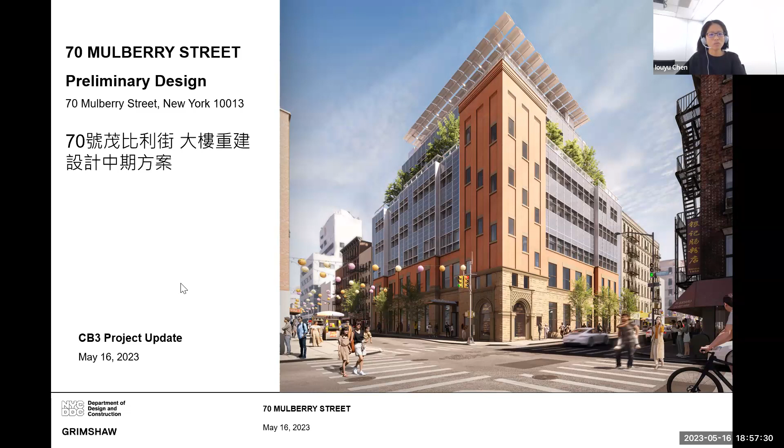Following the January 2020 fire and July 2020 announcement of funding and process goals, the community visioning process was initiated in September 2020 and led by 3x3 working for the owner, DCAS. An initial preliminary research and planning phase was followed by a series of community meetings and workshops, a survey, and an ongoing document review for 90 days.

The result of the community engagement led to DCAS and DDC brief and a budget to rebuild 70 Mulberry in November 2021, including additional offices and tenant spaces and a multipurpose athletic activity space in the new building. Grimshaw and the team was selected by DDC to design the new building. The design team started the programming phase in July 2022, a meeting with 5 tenants that previously occupied the building and will return to the new building. You can see a list of community engagement that already happened, and at the bottom is upcoming engagement event.

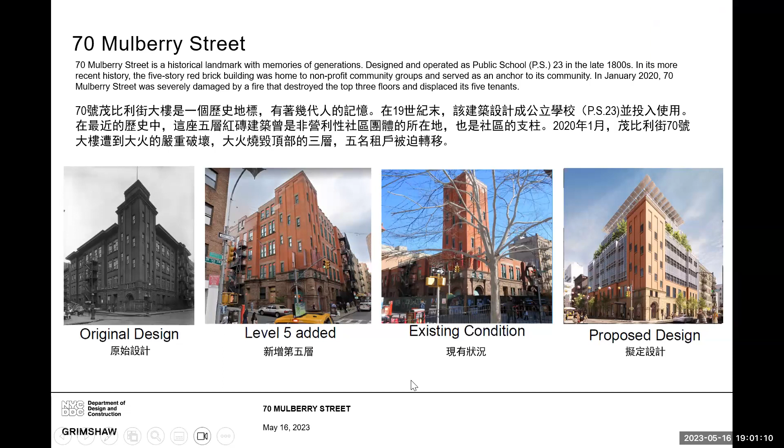I'm sorry to interject here. We have just seen this presentation last month, most of it. We were hoping that because we have such a crowded agenda, perhaps you folks could focus on just what's new from the last time this was presented at CB3. Would that be okay? Yes, I think the next page will be new content. Thank you. Sorry, we're just very pressed for time.

So this is where we talk about the design updates. What has been different from the previous show?

First, the biggest one is we keep the existing cellar boundary and the cellar floor slab, and build a new level 7. So the building adds an additional floor, level 7. We retain the current extent of the existing cellar without any further excavation beyond its perimeter walls and without going deeper into the ground. This approach aims to reduce expensive construction and mitigate potential unforeseen risk associated with the cellar, and we move half of the mechanical space from the cellar to level 7. The leftover space on level 7 is assigned for additional community space, enhancing the overall value and livability of the building to the community.

The second point is we apply building integrated photovoltaic panels to the new facade and a PV canopy above the roof to generate renewable energy. By implementing these panels on the new facade and adding a photovoltaic canopy on the roof, we aim to harness the maximum renewable energy through solar power generation. The BIPV technology allows photovoltaic panels to be seamlessly integrated into the facade, with maintenance similar to a typical glass facade.

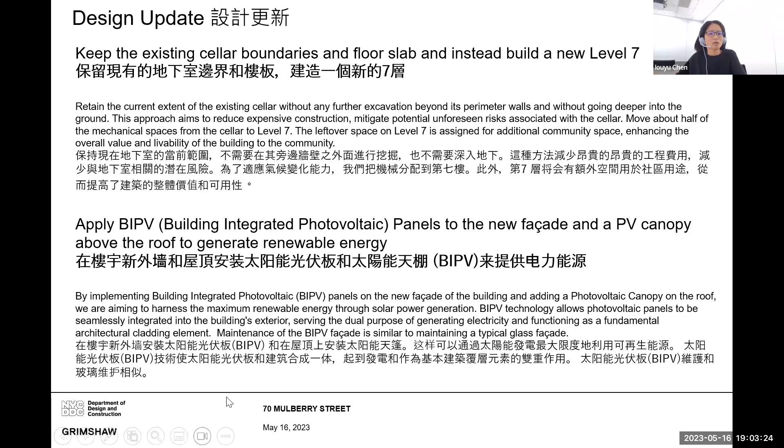Next, we'd like to share the previous rendering we shared with you. It was a 6-floor building with level 6 setback from the street. The stair tower is a key contributor to the architectural character, but in the previous model, we modeled it 8 feet taller than it is in reality.

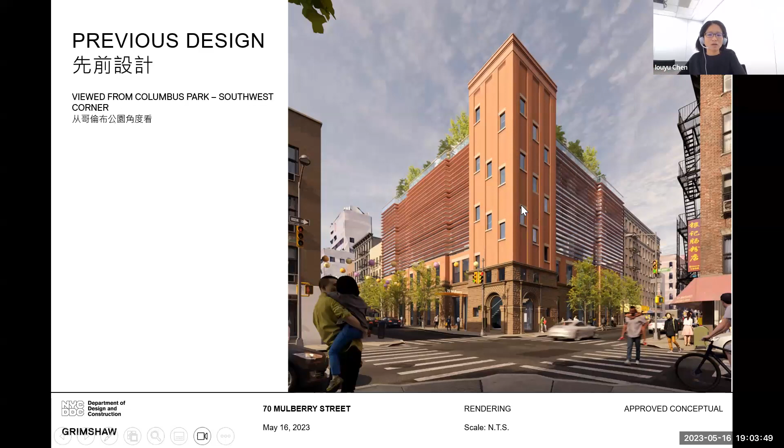We have street trees planted echoing the greenery from Columbus Park, and trees will be planted at the terrace level. The design is to distinguish the old and the new facade.

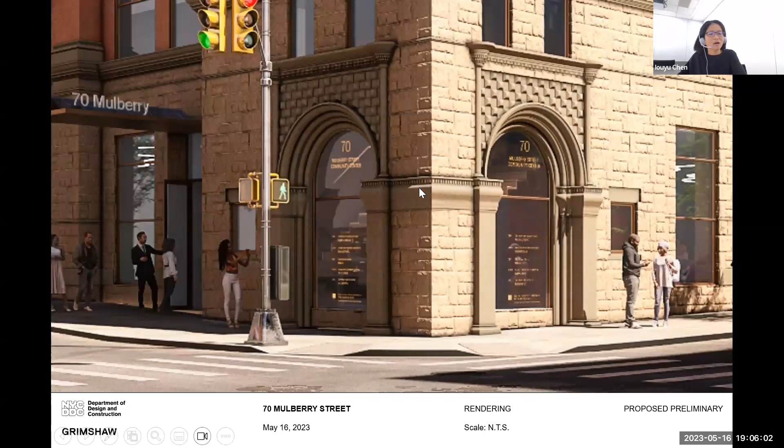We're taking a closer look at the proposed ground floor. You can see the new entrance at Mulberry Street, adjacent to the stair tower.

The tower window proudly displays signage showcasing the 5 organizations within the building, along with important building information. This serves to broadcast the diverse programs and services offered, while also encouraging the community to make use of this vibrant space. We are in collaboration with an advisory group to do the signage design to ensure it maximizes its benefits to the community.

We are going to walk you through the revised plan. First, this is the proposed site plan with 3 street trees planted along Mulberry Street and Bayard Street. And then we have a PV canopy installed on the roof.

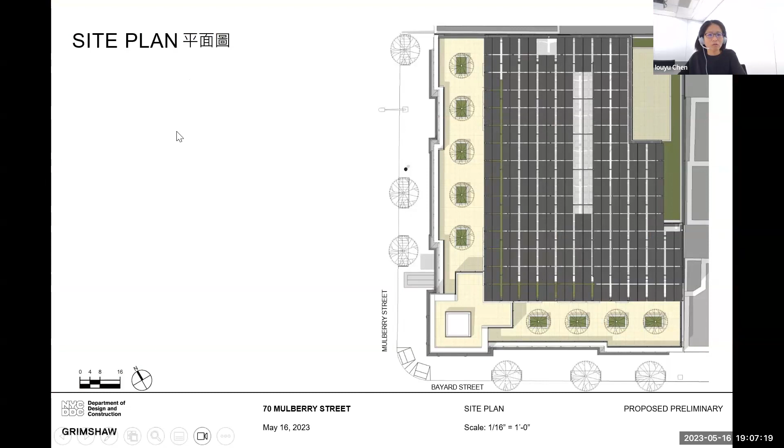This is the first floor plan, and we have entrance at Mulberry Street. Tenants and members will have their badge and be able to swipe through the turnstile and go directly into the stair towers and up to their floors as in the pre-fire building. A visitor will go through security and be given a temporary pass to get through the turnstile.

For those, to Jake's point, we'll just point out the key changes since last month. The building trash area is now integrated along the back of house service corridor, and the elevator at the south is a swing elevator, serving both the freight and passenger elevator functions, so the back of house services are not crossing the front of house services.

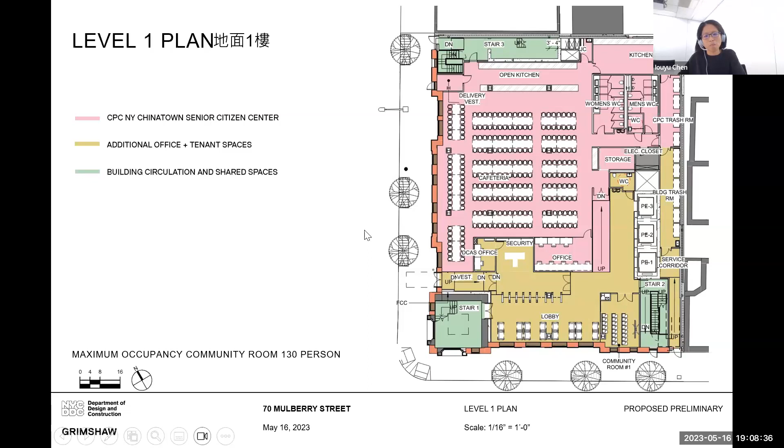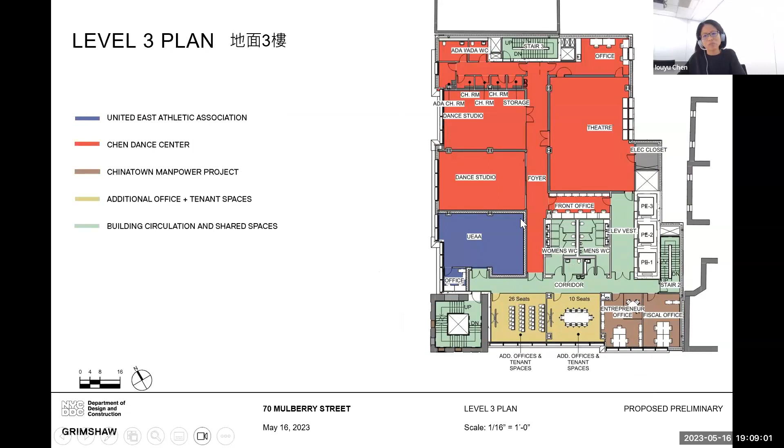This is level 6, the double-high multi-purpose space. In the following slide, we will share more about the flexibility and how it adapts to different event modes.

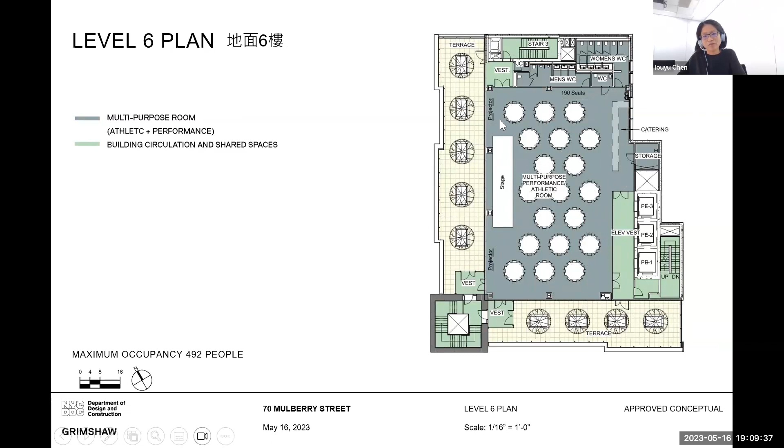To support the multi-purpose room on level 6, as we mentioned before, we have storages and fabrications, and the space can be accessed through the service elevator.

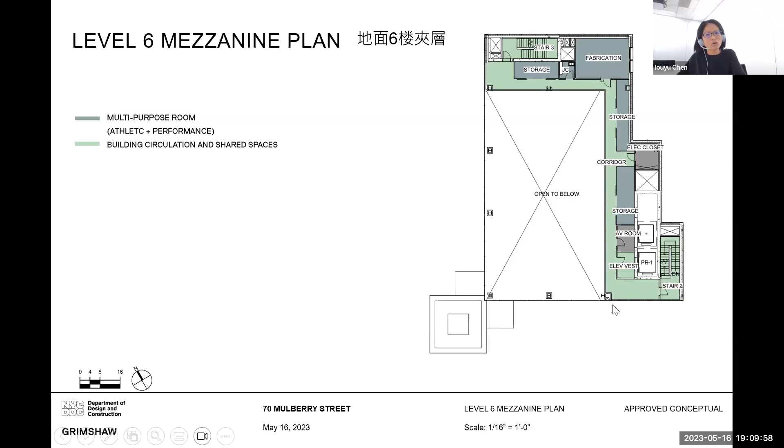This is the new level 7. This is the bonus area, extra space at the southwest corner, facing Columbus Park, which will be dedicated to community use.

As mentioned earlier, we located about half of the mechanical space to level 7, and this is the leftover space, the bonus area. It's additional community space, and it's a prime location with a great view towards Columbus Park.

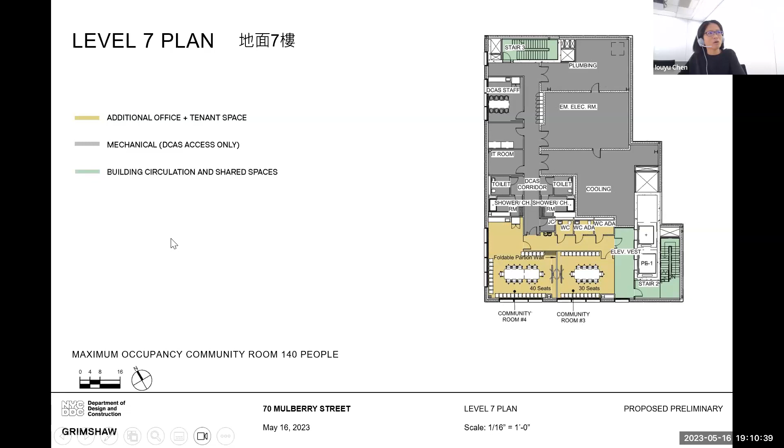This shows the roof plan. We have a seating area along the west and south property line.

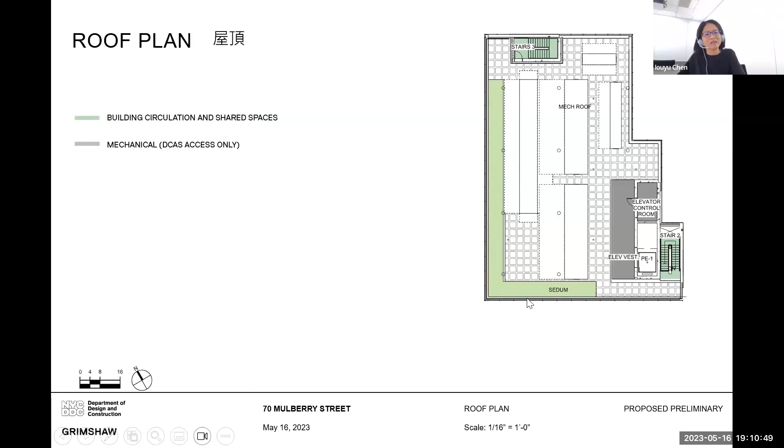We'd like to take a closer look at the community space on level 1. It's equipped with movable partitions that can be folded to accommodate various activities.

The lobby area can be arranged in different configurations based on the needs. For regular use, it serves as both the lobby and the community space. For events, the lobby area can be extended to create a larger space suitable for lectures, community meetings, and galleries, as shown at the bottom.

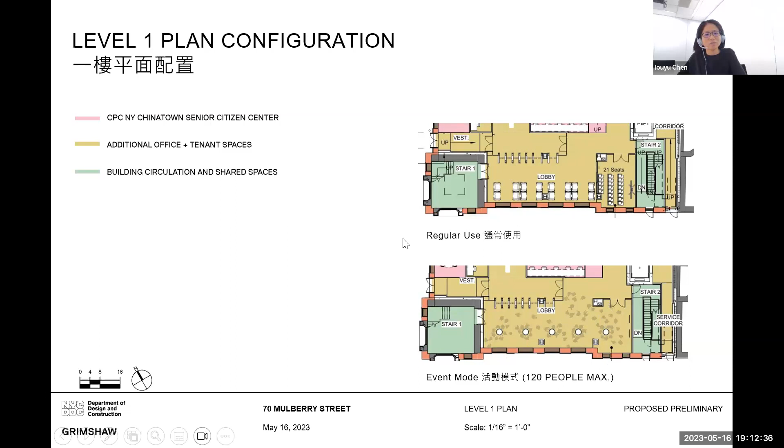This is the level 6 plan configuration. The space is designed to accommodate a wide range of events such as community galleries, press releases, job fairs, and fundraising activities. This slide illustrates the versatility of level 6, showcasing diverse activities ranging from galas to lectures, with a maximum capacity of 492 individuals.

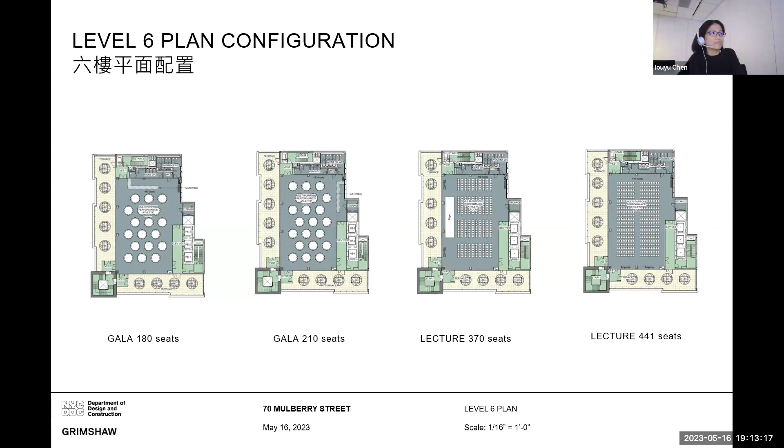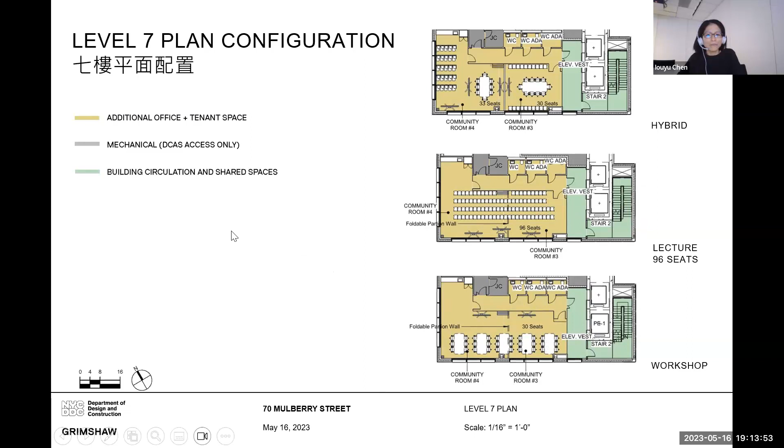This is the update we are very happy and excited to share with you. Please contact us if you have any feedback or any questions.

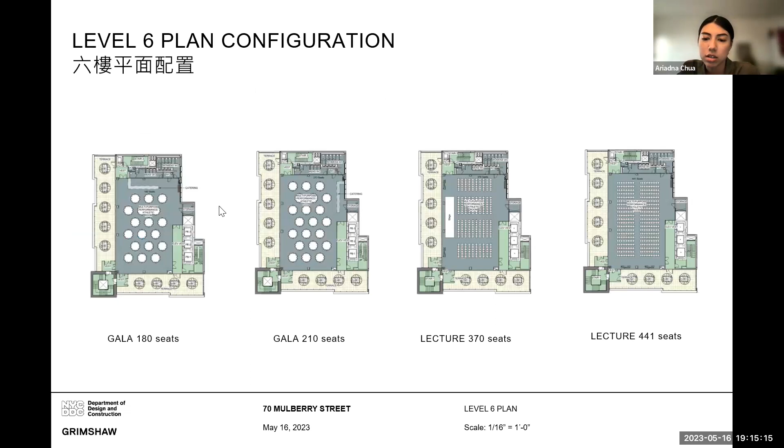We always have space on the 3rd floor for the community space. The new space will be on level 7.

Okay, that's clear. And then I was wondering where the addition of the solar panels came from. Was this something that was requested specifically? How did that end up being added to the design plan?

I think the previous design we shared is a massing study, and we are investigating different cladding material for the facade. And we met with the community members. We found we want to make this building forward-looking, and make a commitment to the next generation. We figured climate change is the very urgent task for our current generation. So this building should demonstrate that statement, the more forward-looking for the next generation.

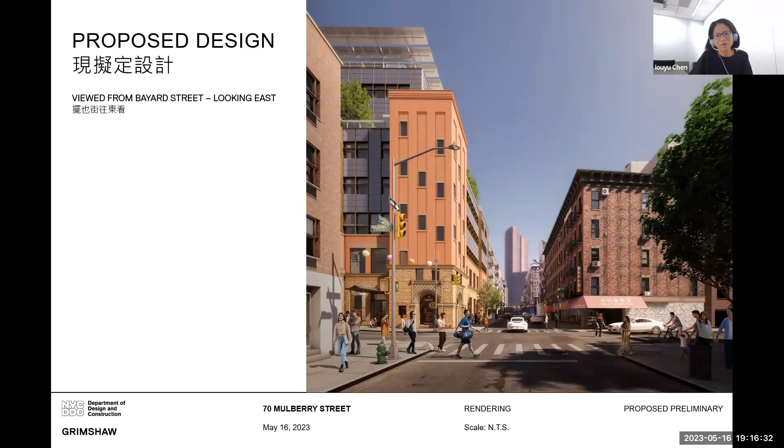And the building photovoltaic, as you see on the screen, the maintenance is similar to the glass facade. It's very low maintenance, but at the same time can generate energy up to, I would say, up to 25% of the building energy consumption.

That's clear. Thank you.

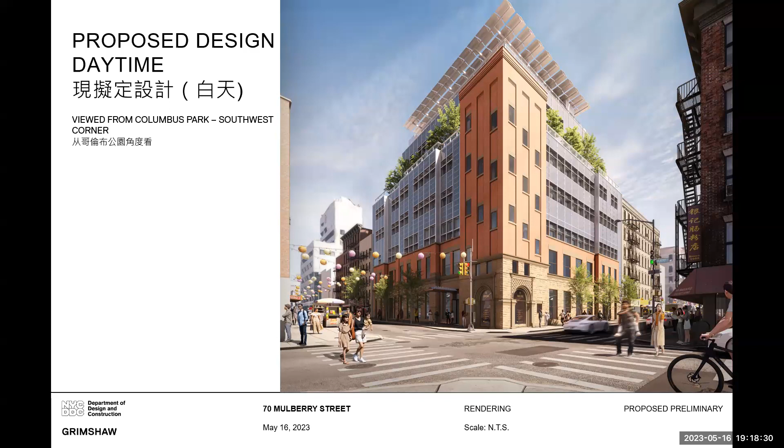For your first and third questions, I'd like to defer to DCAS, and for your second question to Grimshaw. So, Joe from DCAS, please.

Thank you. For the first question regarding the additional community space, that will be reserved in a similar manner that the rest of the community space is in the building, through a booking process that DCAS will establish, so that all the community space in the building will be booked in the same manner. Also regarding the question about MOCA and relocation, the commitment was to restore all 5 tenants. I'm unaware of any communications or discussions otherwise, but I will make a note of it. Thank you.

Yeah, and I can jump in and add to Iouyu's explanation on the facade and the PVs. I think for us, there was a strong sense from the community about looking back and respecting the past and the heritage of the building, and preserving what's left and making it integral into the new design. And also our desire for an optimistic and hopeful building for future generations. This is a place where the community gathers and learns, people get training, kids learn new skills, socialize. And in order for them to have that hopeful and optimistic future, we need to address the climate emergency. So for us, that was the way to reconcile looking back with respect and looking to the future with hope.

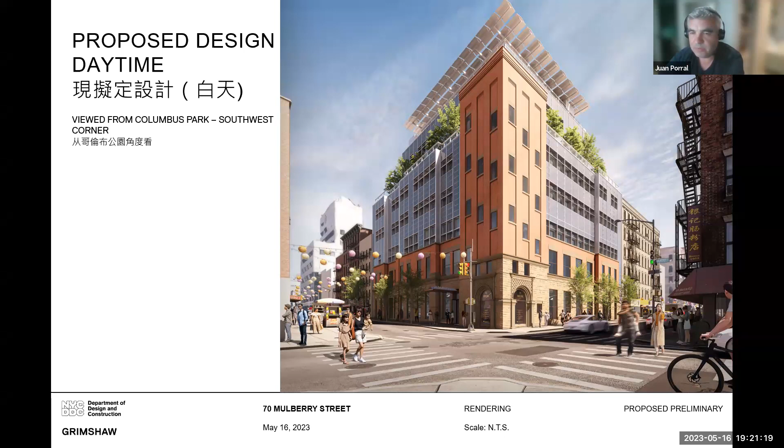So our engineers are proposing that, I mean, we're using all the electricity that's created here, but it feeds into the grid if there's any excess, rather than having batteries on site, which are costly and still have some risk, you know, about fires as we've seen. So yeah, that was their suggestion. It's the most effective way to do this.

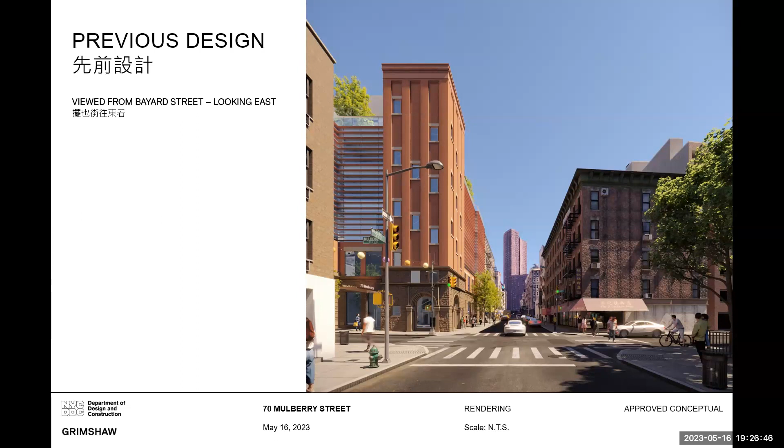I was a bit hesitant to respond, because I am on the landmarks committee, but I feel remiss that I didn't follow what LPC said about the building when you went to landmarks. But I, of course, agree with Richard. It just doesn't complement, I don't think, the lower floors. The upper design does not complement the lower floors. It doesn't complement the community. I think we're seeing too much of this gray, this gray material.

And I just don't understand why you didn't try to replicate what was there before. You can add the top floors, but it just doesn't match well. It just doesn't look well together. So I agree with Richard and Eric. Maybe you should go back to the drawing board and try again. Thank you.

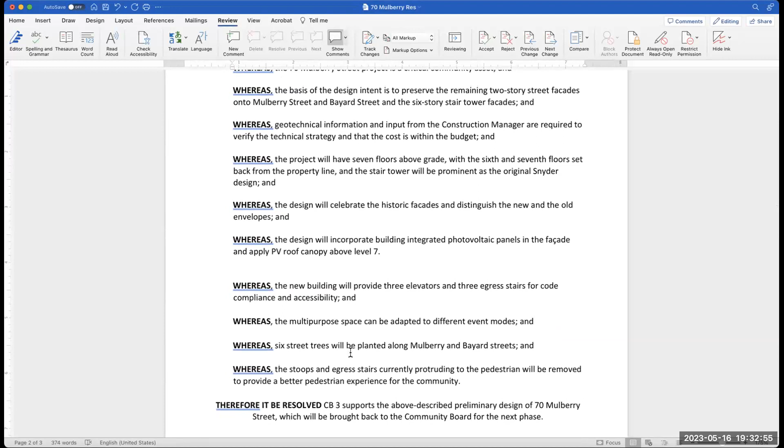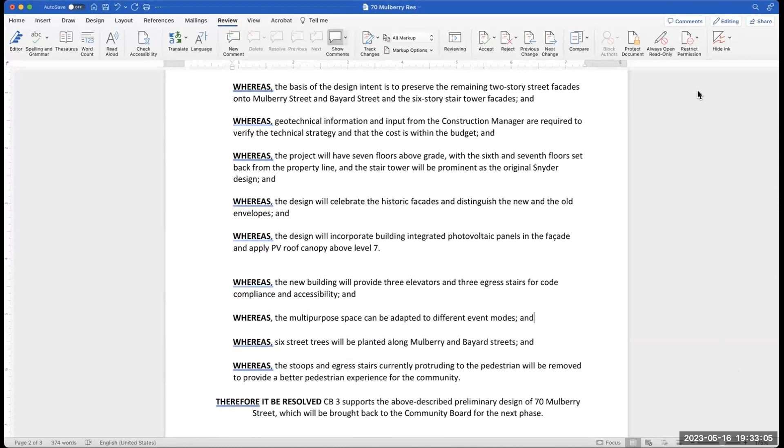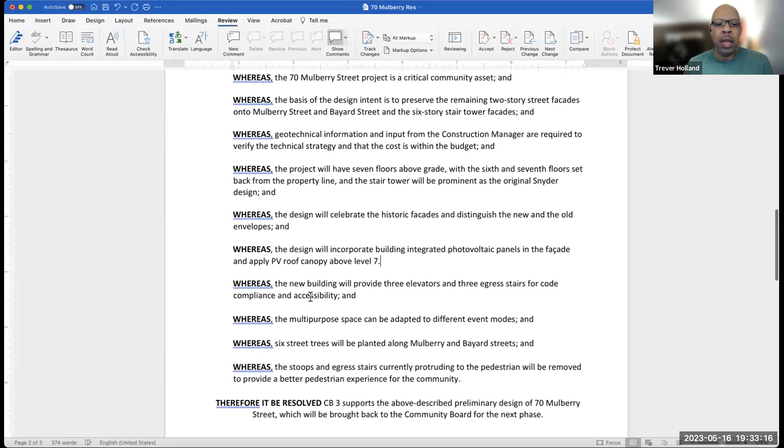I see hands raised. Trever, go ahead. Yeah, I think when we do this, it's important that we not take a position immediately. At the last line, 'therefore it be resolved, CB3 supports' - I think that just immediately puts it into a state that not all members may or may not agree to. So I think it's important that in most of the resolutions we write, we leave that blank. We need to take that out before anything. We did hear some concerns from the community. I was hoping to hear some more from folks who live in the community. I know we heard a lot from preservation specialists, which is critical, but what is also critical is for folks who live in that area. I know there were a lot of people on this meeting, and maybe they didn't feel it was appropriate to speak, but I didn't really hear that. Just to make sure that when we write resolutions, we don't immediately say that we support or not support a particular position.

Sure, and I apologize if this was a violation of norms. My understanding was that when we receive a model resolution from an agency, we can take that resolution up as written. This was not written by me. This was a resolution written by the agencies and sent to us for us to approve, which is why it says that we support. If we decide that we don't support, of course, we can take it down.

Now, I'm sure Susan will correct me on the norms here. Susan, if you want to go ahead. No, I'm going to say I feel guilty that I didn't catch that. Usually we take their resolution, which captures all the information, but leave, as Trever says, leave the last part blank because it's not predetermined. And I think we just got it from them, and I certainly didn't read it closely enough.

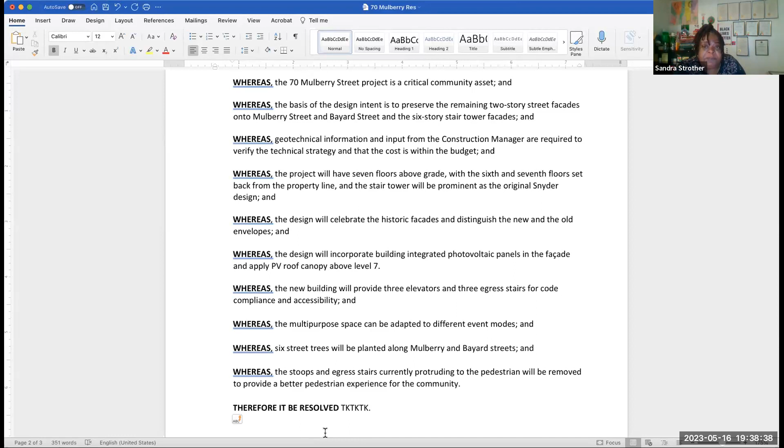Okay, Sandra, do you have amendments that you'd like to propose, or Trevor? Sandra first. No, I won't, because like you said, it's already been approved. I wasn't at the last meeting, so you're only talking about a specific part of the building.

Dominic, go ahead. I just want to say, I think I would be in favor of approving this. I know Trevor's working on some language for how to incorporate some of the feedback, so I think I'll wait for him to do that. But I hear the concerns, and I think when we are facing the crisis that we're in, and you're developing something, it's very difficult to retrofit once it's done.

And I think it would be great if there was some way to break up the panels a little bit more. I think that was what maybe some people were responding to, but I think fully removing them would be an immoral mistake. So I would say that we should support this as pretty much as is.

And also pointing out that it should be 'be it therefore resolved,' not 'therefore it be resolved' as it's written at the bottom right now. I noticed that, and I was having like a Mandela effect thing happening where I was like, is it always 'therefore it be resolved'? But that doesn't sound right. Thank you for your comments, and I will make that change.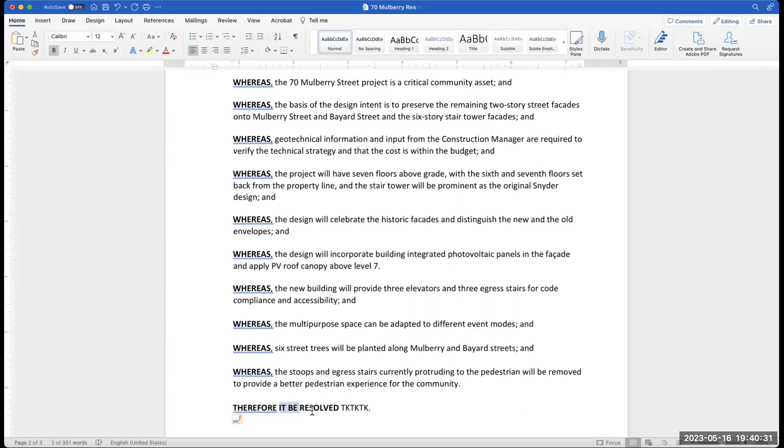Ariadna, and then we can go back to Trevor and Sandra. I had a clarifying question. So if we were to edit part of what we approve—let's say we remove the full photovoltaic panels from the resolution—does that mean we only approve the additions that were made in the plan that doesn't include those panels, for example?

Are we able to pick and choose the changes that they proposed? Can I defer to Susan on that procedural question? I think you can approve or not approve whatever you want, but if they have a design that has solar panels, are you saying you don't approve them, or are you just leaving them out? Do we need to word this carefully to refer to the previous design we already approved, or reject it fully since it wouldn't be the design they're proposing anymore? I think you could ask that they revisit the solar panels.

All right, Trevor, go ahead. I share Dominic's concern about incorporating the solar panels, but I want to ask the architect about them, if I could. From the picture shown, they appear to stick out over the roof. If you were to shift those back to on the roof, how much does that change? Instead of them hanging over the side, if you move them back to where they were on the roof, would they still be as efficient?

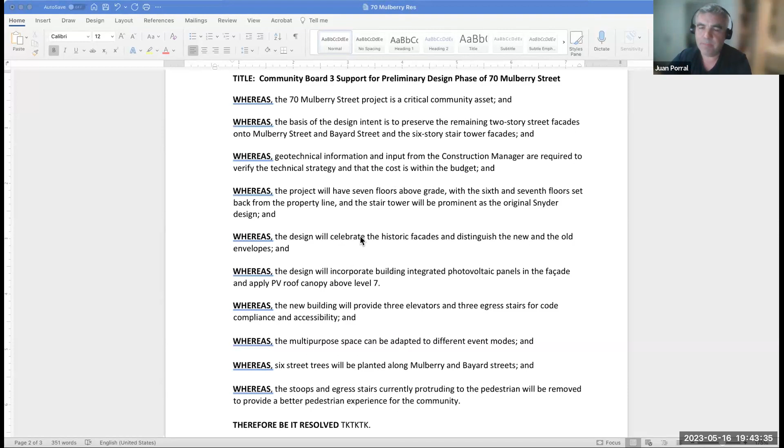I guess you're saying there's something behind those panels, based on the renderings, that prevents them from moving back further. Right, because we show the site plan, and there are PV panels over the mechanical roof, the setback piece, over all of the mechanical roof. So it would just be about eliminating some of the panels on Mulberry and Bayard, reducing the amount of panels, because we can't push them back further since we're already over the site.

So you're saying you can't push them back to where they're over the roof, they're back as far as they can and actually overhang the mechanicals. They're literally over the roof. It's the angle, the way the rendering is done, that makes it look like they're overhanging, but they're not. They're on plan, literally set back 20 feet directly over the mechanical roof.

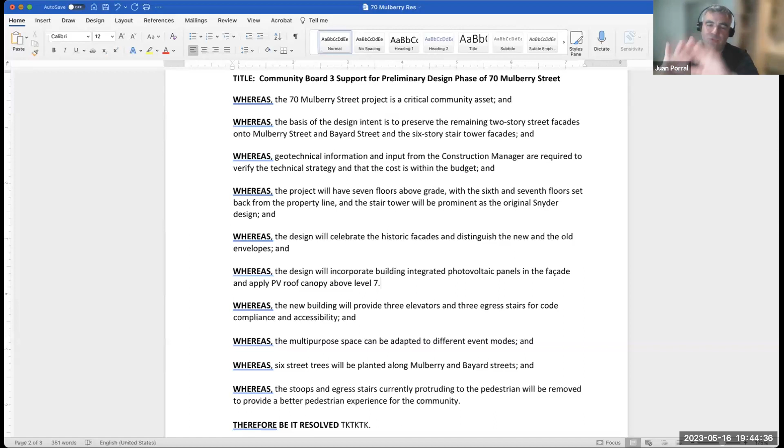Okay, it's almost like a perspective trick, maybe from trying to straighten the building in perspective to show it vertical - that's what happens, it looks a bit distorted at the top. If we did a human view from street level, the eye doesn't see it quite like that, you'd have to look up. So trying to show the whole building in one rendering becomes a little distorted in order to do that. It's not how a human eye would see it. Okay, thank you.

Megan, go ahead. In light of Juan's comments just now, knowing that those solar panels are set back 20 feet, just like the 6th and 7th floors, and also in light of the fact that we've, as a community board, already agreed to most of the design of this building - it's just these new aspects - I would lean towards supporting this project.

Thank you, Megan. So in light of everything we've heard from the architect, and thank you for sharing that context - Trevor, Sandra, do we still have amendments we'd like the committee to consider, or would we like to consider the resolution as is? I don't have any additional comments. Neither do I. I would like to see an additional rendering, but understanding that we're time crunched, and there's something on the agenda dealing exactly with this type of issue, I don't have any additional comments.

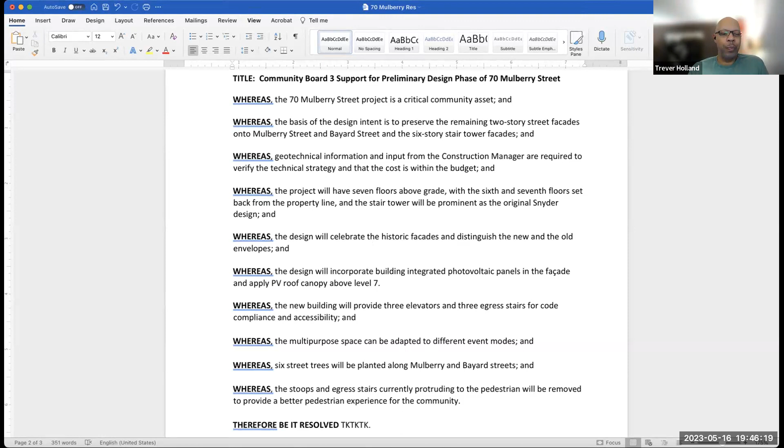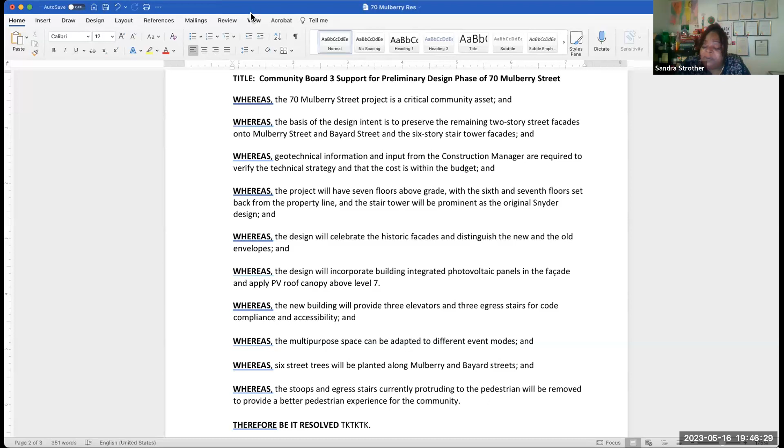Neither do I, Jake. I just wish the architect had a better rendering so we could have a clear picture of how the building will look. But sure, I don't have any objections. I've never made a rendering, but I imagine it's very hard, so I appreciate the difficulty there.

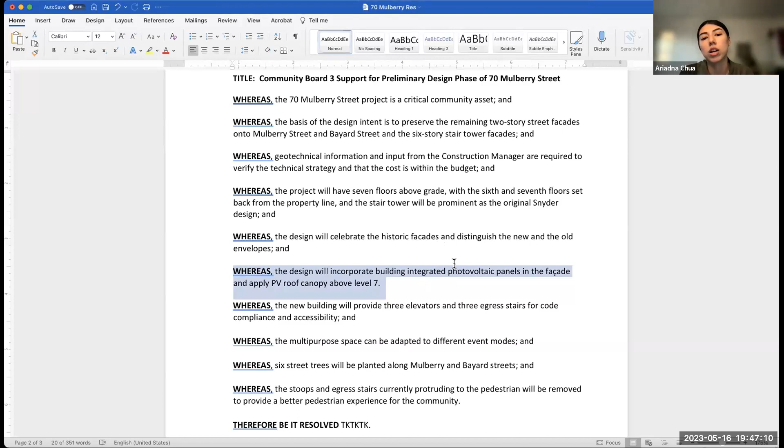Ariadna, do you have an amendment? I would like to propose an amendment where we remove, in the 6th whereas, the integrating of photovoltaic panels in the facade. I don't have a problem with the roof canopy, but I think a lot of people spoke up in opposition of the way the facade looks compared to the rest of the neighborhood and the character of the more historic buildings. So I'd prefer if we remove just the integrated photovoltaic panels in the facade and keep the PV roof canopy.

I understand. So, is there a second, Trevor? Is that what you raised your hand for? No, I wasn't going to second that, I was just going to comment.

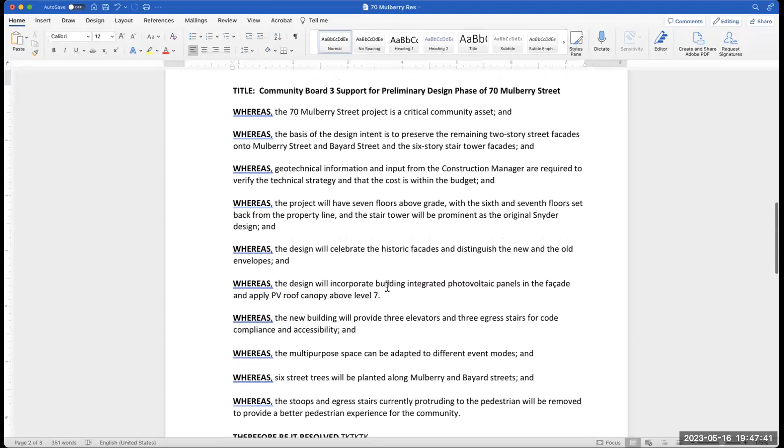If I could briefly say, my guess is that the way we would speak to that is in the therefore-be-it-resolved section, we would say we support the above described design with the exception of, rather than removing the description of what was presented to us. Does that sound right to folks as a matter of resolution writing?

Well, I have a real issue with removing the photo panels at all. I don't think that's a big critical issue. I know this is a historic neighborhood, but in terms of what we're facing climate-wise, the city is attempting to build solar panels in a building, and we're saying no, we don't want to do that. I think that's wrong. I think we're going to have to face some choices.

I do agree there could possibly be a better design, and maybe we're not seeing it from the renderings, but to remove that, I think especially with what we're going to hear a lot about in our next agenda item, would be a big mistake for us as a community board, considering sustainability and all the other issues. Change is hard, and I get that, but if it was completely set back on the roof, it might not be as jarring.

But I'm hearing the architect saying that with a 20-foot setback, the rendering isn't as accurate as what you would actually see from the street. I think it's a pretty difficult thing to say, removing it. I think the middle ground may be to say we'd prefer if there was a way to move that back—it would be better—but not to remove it entirely.

And I think it's actually required for new roofs anyway, from the local law perspective—any new roof either has to be painted white or have photo panels on it. I think we've got to be very careful.

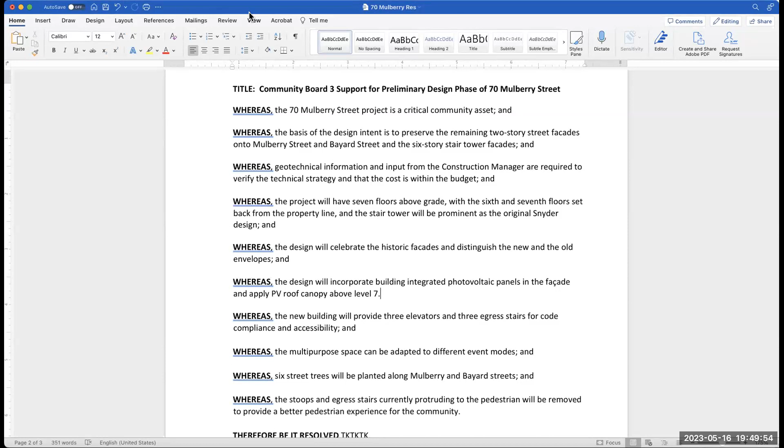Does anyone have amendments to the resolution before we take it up for a vote in support of the preliminary design phase? I do, Dominic, go ahead. I'm about to put it in the chat—people can tweak it some.

Whereas the current climate—this would come after the whereas about the photovoltaic panels in the facade, so after number 7 it should say: whereas the current climate crisis we are in calls for immediate, all-tools-out-of-the-toolbox measures, the addition of PV—we can spell that out—on the facade and roof are a responsible measure and send a message about the importance of sustainability to the current community and future generations.

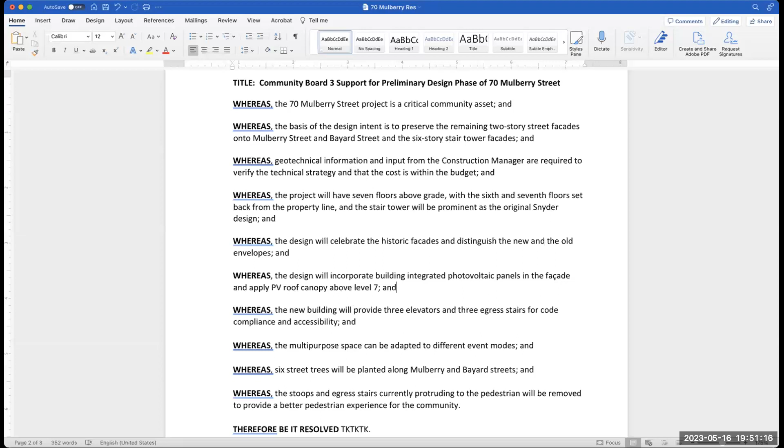All right, folks can see that proposed amendment in the chat, I hope. Do we have a second on that amendment? I second that. Okay, so I'm going to put this in track changes. Oops.

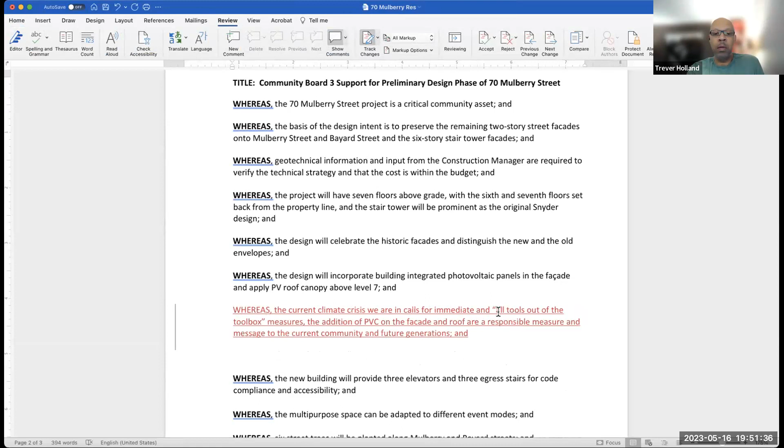I wish there was a way to go to 50% of building sustainability, but I know it's difficult with today's technology, especially with the weight of batteries. A responsible measure and a message.

Sorry, Dominic, could you repeat the message about sustainability? Yeah, I added it to the chat: a message to the current community and future generations about the importance of sustainability.

Okay, Dominic, you also mentioned spelling out PV - photovoltaic panels. Did I get 'voltaic' right there? Yeah, looks like it. Okay.

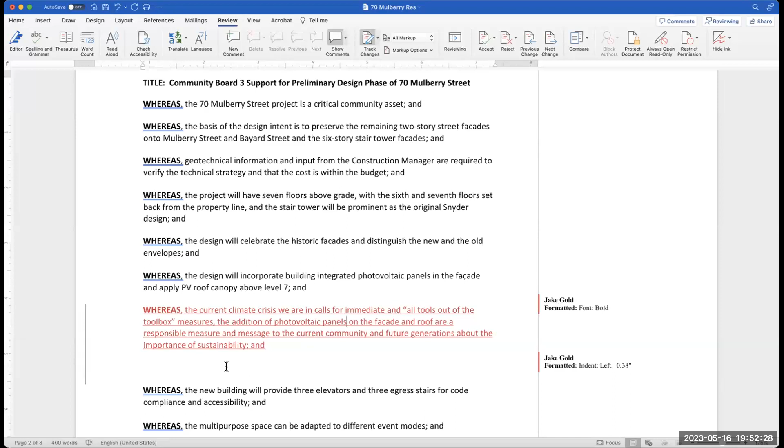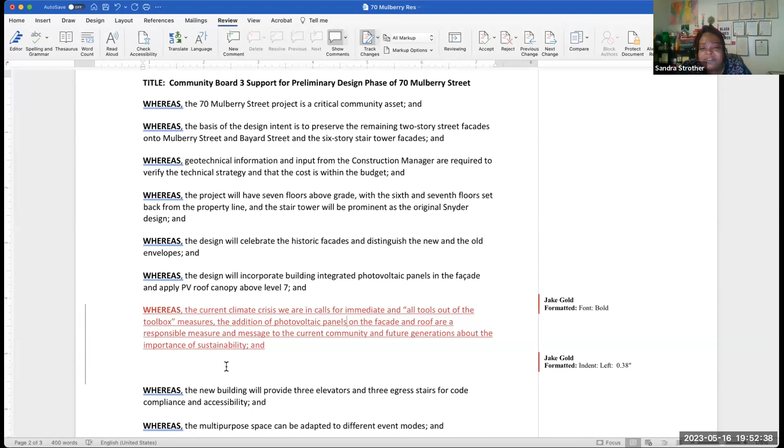So I guess we will do a- Excuse me, Jake. Sandra, go ahead. I have one more thing. There's one 'whereas' that I totally disagree with: it's where the design will celebrate the historic facades and distinguish the new and old envelopes. I really don't think that it does.

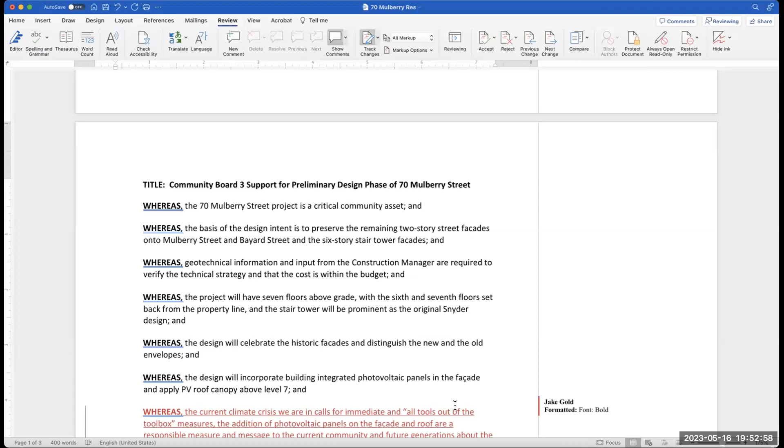I think it clashes. Sandra, I'm sorry to cut you off, but can we take a vote on this amendment first? Oh, I'm sorry, okay, yes. I just want to make sure we're going in order. Okay, I'm going to, I guess-

Actually, how about this - no, let's do a roll call vote. Give me one moment to pull up attendance. Okay, you could just ask if there was any opposition. Yeah, that's the right way to do it. Does anyone oppose this amendment? Speak now. All right, the amendment is adopted.

Now, second amendment - Sandra, I'm sorry, go ahead. Oh sorry, Herman has an objection.

Let's see - I'm sorry, I'm not familiar with the parliamentary rules here. If we attempted something by unanimous consent and someone says no, do we need to proceed to a roll call vote? I don't know if he's opposing it or saying that he doesn't oppose it. That's a good question. Herman, would you mind clarifying?

I do not oppose it. Good, all right, the amendment is adopted. Sandra, go ahead, present your second amendment.

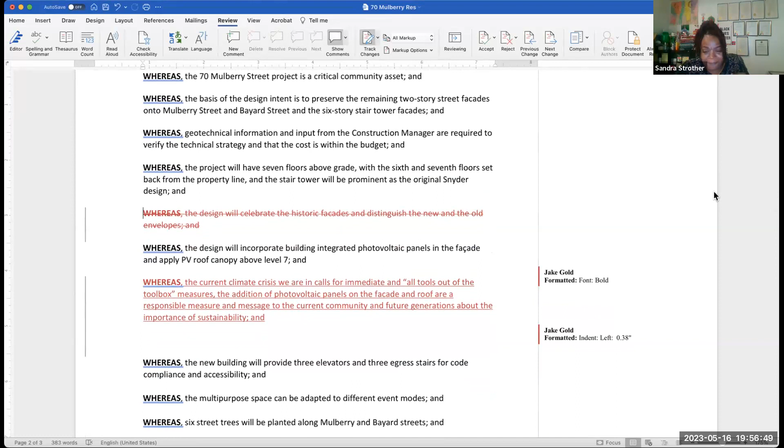All right, does anyone - Dominic, I see your hand is still up. Sandra, your hand is still up. Do you have amendments, or are we ready to move on to the therefore-be-it-resolved clause? No, it sounds like we're moving on.

Moving on. So I would propose an amendment that says: Community Board 3 supports the above described design for 70 Mulberry Street, for the community center at 70 Mulberry Street. Do I have a second?

Second. Thank you. Are there any objections to this amendment? All right, hearing none, the amendment is adopted. So I'm going to accept all of these changes.

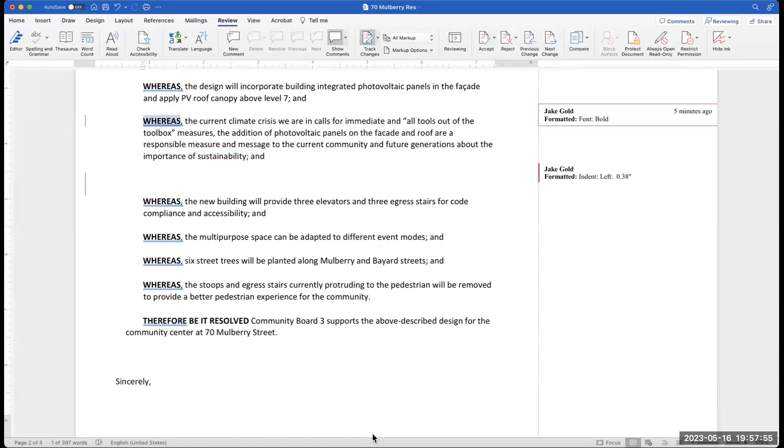All right. Now, I suppose, are there any objections to accepting this resolution as written? And I'm going to show it in its entirety so that we can-

One question - if I vote against it, what does that mean? Does it mean it's just on the record that I didn't vote for it? Right, yes, that's right. I would personally like to reject. Okay, we have to have a roll call vote. Yep.

So for adopting this item: Jake Gold, yes. Damaris Reyes...

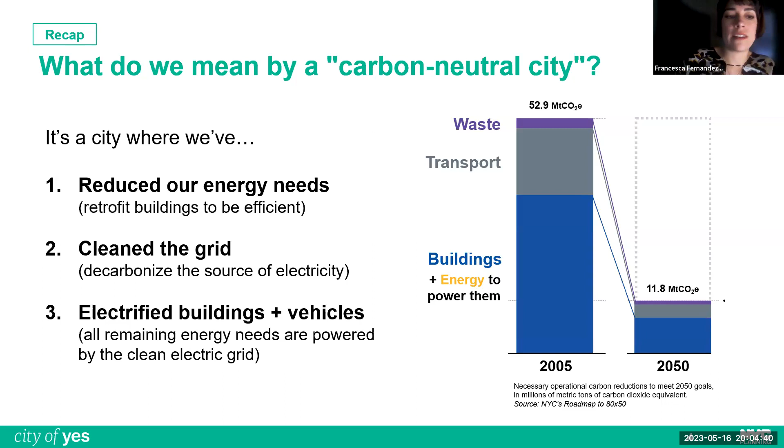And this isn't the first such initiative. In 2012, the department issued Zone Green, which is the first comprehensive overhaul of our zoning to support emerging green technologies like rooftop wind and solar. And while this was a good start, it could have gone further.

So in some ways you can think of our research now as a follow-up to Zone Green, basically a chance to revisit it after 10 years and update it in light of the many technological and legal changes since. These include, since 2016, the focus on decarbonization coming from the Paris Agreement and the 80 by 50 plan. It also includes feedback from architects, engineers, advocates about issues they've identified and ideas for improvement.

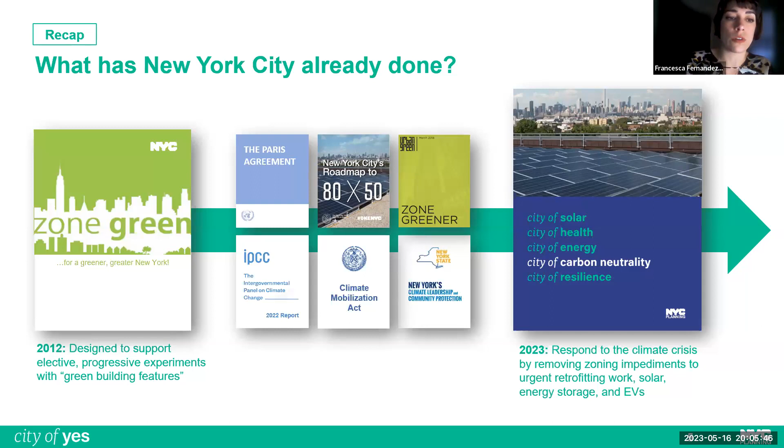This resulted in updating the zoning to reflect, firstly, the Climate Mobilization Act at the city level, especially Local Law 97, which will impose strict fines on large buildings which do not reduce their carbon emissions, as well as, secondly, the Climate Leadership and Community Protection Act at the state level, which in particular set ambitious solar and energy storage goals for the city.

So development of this proposal began in March when Mayor Adams announced his vision for a city of yes. And since then, we've conducted extensive outreach, in particular with practitioners and other subject matter experts, to make sure that this proposal will be helpful.

DCP is aware of criticism that there hasn't been enough sharing of information about what we're working on until it's already in the public review process. So to make good on our promise to do better, we've held 4 open to the public info sessions on this research, 2 in October of last year and 2 in March of this year.

Our chair, Dan Garodnick, invited all the community board chairs to these and encouraged them to share the information and events with their boards. And then last month, we also partnered with Urban Green Council, which is a recognized leader in climate work in New York City, to convene a group of technical and policy experts to review an initial draft of the proposal to validate the climate goals and the solutions we're putting forward.

Along the way, we've been asking experts, nonprofit leaders, advocates what we need to help achieve our collective climate goals and how has zoning helped or stood in the way. So tonight we'll review 4 key goals the proposal seeks to support that arose from that feedback, as well as the 17 specific zoning changes we've identified to achieve all of those goals.

So here is a quick snapshot of those goals and their relevant proposals, which I will go into in a moment, but just to give you a bird's eye view of what we're looking at here. It includes updating our energy landscape, and that in itself includes measures relating to solar, wind, and storage.

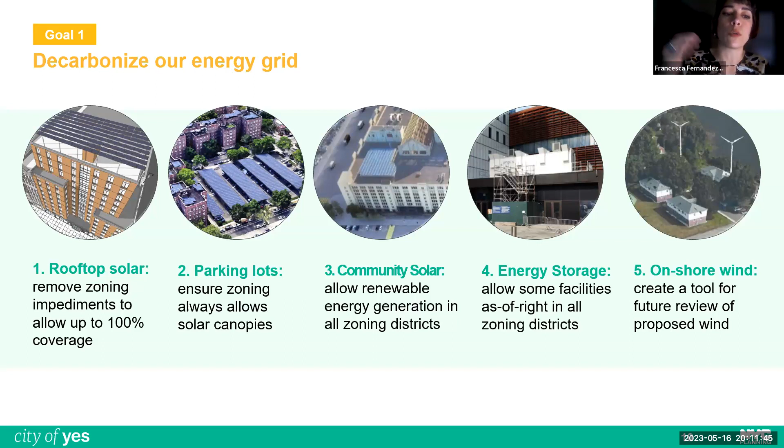And then finally, on onshore wind, which faces strict limits in today's zoning without a relief valve for sites where greater heights may be appropriate, the zoning proposal will create a new tool to submit onshore wind facilities for public review with the City Planning Commission. So to be clear, this proposal does not change the current height restrictions on wind turbines, it just allows for public review on a case-by-case basis.

The second goal we're seeking to support relates to eliminating fossil fuels from our city's million-plus existing buildings, almost all of which will be around in 2050 when we need to have achieved carbon neutrality. These buildings are by far our biggest sources of carbon dioxide emissions, and to improve, we'll need to retrofit virtually every single building to retire oil or gas-powered furnaces and boilers, and replace them with new, highly efficient electric systems, as well as improve the efficiency of exterior walls, windows, roofs for heating and cooling.

It's important to note two laws adopted by the City Council in 2019 and 2021 that are crucial here. First, for large buildings, defined as buildings 25,000 square feet and larger, Local Law 97 will begin to impose fines on these buildings if they do not cut their carbon emissions, starting in 2024 and increasing through 2050. Second, Local Law 154 requires that all newly constructed buildings are electrified from the get-go; fossil fuel-based equipment will no longer be allowed in new construction.

Within this context, zoning can help support the decarbonization of buildings in three key ways. First, zoning can accommodate increasing need for outdoor equipment, such as heat pumps, which can't be located in building basements or cellars, and it will allow them to be located above the zoning height limit on building rooftops. By getting zoning out of the way, we'll give homeowners, architects, engineers greater flexibility to navigate their best path to electrification.

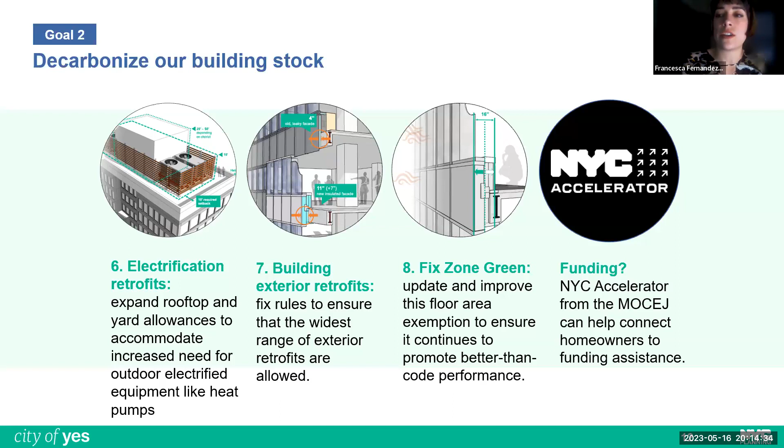And then finally, of course, we have to talk about cost. Undertaking the work won't be free, but there are billions of dollars at the federal, state, and city level available to support it. The New York City Accelerator Program, run out of the Mayor's Office of Climate and Environmental Justice, can help connect folks with both technical and financial support to empower these projects.

Goal 3 has to do with supporting decarbonization of the private vehicles that New Yorkers drive and own. There are currently 2 million private vehicles registered in New York City, and a tiny fraction, less than 1%, are zero emission.

To help owners make the switch to electric, federal and state initiatives are underway. But one key issue zoning touches on is where you park and charge your electric vehicle. Addressing this need will be key to helping New Yorkers make this switch. Albany has indicated that by 2035, all new vehicles sold in New York State will need to be zero emission. While this will be a long-term transition, we know the future is electric, and more vehicles will be electric, thus needing more places to charge.

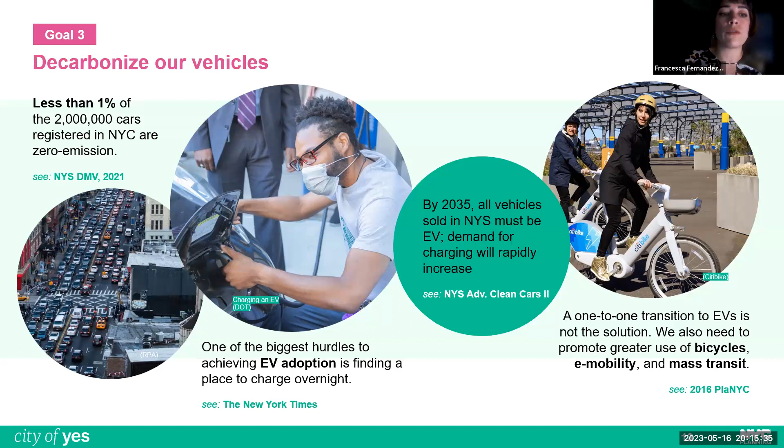Finally, we understand that the future isn't just cars. The more trips that can be taken by bicycle or scooter or on foot or by transit, the better for the health of our environment and our city. Within this context, zoning can help support this goal with 5 key changes.

The first is to allow commercial charging facilities in all commercial and manufacturing districts, because right now they're prohibited in about half the city's commercial districts.

Second, it would allow building owners to designate a portion of their existing parking spaces to offer public EV charging and sharing spaces, similar to the rules that currently apply for car sharing vehicles in existing parking garages or lots.

Third, it would allow for a more flexible use of public parking lots, public parking garages, and commercial accessory parking facilities by allowing car rental, car sharing, commercial vehicle storage, and public EV charging within these facilities too.

Fourth, it would expand the special rules that only apply in Manhattan allowing for indoor automated parking facilities, making them available to everyone citywide.

And fifth, it would update our parking rules to acknowledge the need for public bicycle parking and allow bike parking facilities in commercial districts.

Finally, our last goal relates to reducing our city's stormwater and solid waste and helping eliminate the carbon emissions associated with both of those waste streams.

First, we can reduce stormwater runoff by promoting greater permeability on site. This means less water flowing into energy-intensive treatment plants.

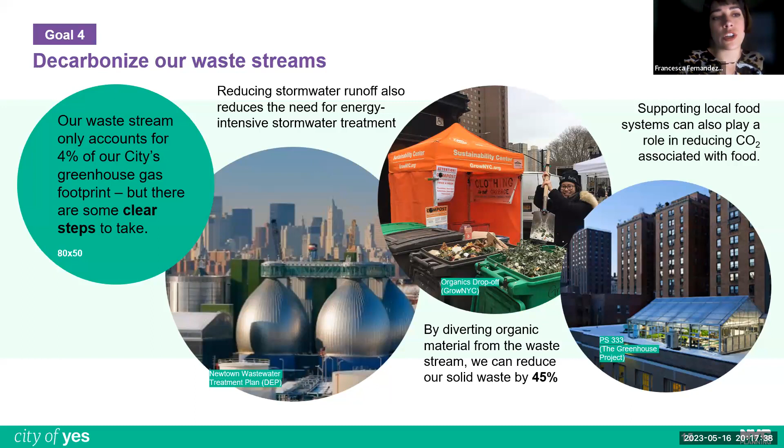And thirdly, we can reduce the carbon emissions associated with our food by promoting more local food production on our city's rooftops. Within this context, zoning can contribute to a better environment in 4 key ways.

First, clarifying zoning's paving rules to ensure that permeable paving, which allows water to infiltrate the soil right where it falls, is always allowed. Second, it would update our zoning street tree requirements to allow for high performing tree bed types, such as connected tree beds and rain gardens.

Third, our zoning resolution doesn't even mention the words compost or recycling. It's time, I think, to add some specific rules clarifying where these uses are allowed to help these sectors grow.

Finally, rooftop greenhouses are allowed on top of non-residential buildings, but to build one, current rules require you to obtain a certification from the chair of the City Planning Commission. By streamlining this requirement, we will allow the Department of Buildings to review applications for building permits, cutting costs and simplifying the process for those looking to grow food on their community's rooftops.

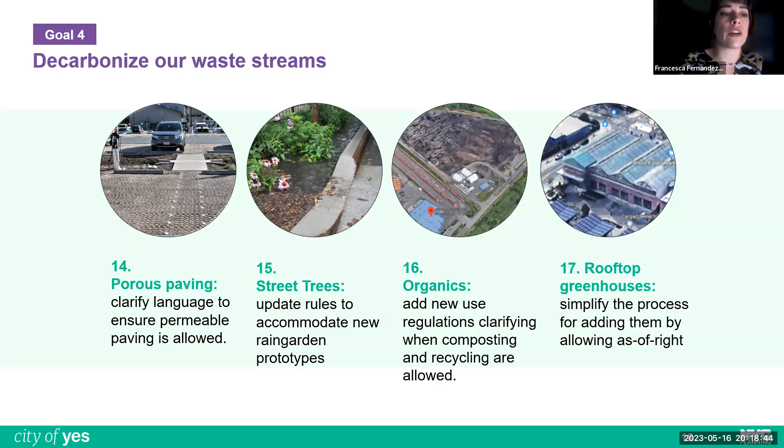So to wrap up, here again are the 17 specific zoning changes we've identified to support the larger project of decarbonizing our city to keep it clean and healthy and equitable for years to come.

As a citywide zoning text amendment, the process will continue for the next several months, and all 59 community boards will concurrently be reviewing this proposal with their borough boards and borough presidents, so that in July, the City Planning Commission will hold a public hearing on the proposed changes. Then in August, the commission will consider all the feedback they've received and vote on approving or modifying the proposal, and will then pass it on to City Council, where the council will have 50 days to ultimately adopt zoning changes and make them law.

So that's it. And of course, if you have further questions about these proposals or this process, I'm happy to try to answer those, bearing in mind that I may have to take them back to the teams behind this robust proposal. Thank you so much for taking the time to engage with this again today, truly.

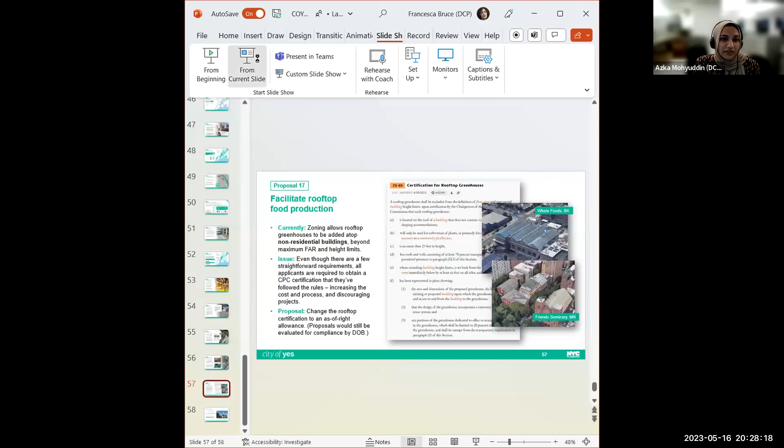But okay, if we can't get that, a greenhouse is defined in the zoning resolution, but it's not changing the rooftop greenhouses. They're used for different things - sometimes for food production, sometimes just for growing different things. So any sort of rooftop gardening would be considered a greenhouse.

And the only thing we're really changing is that currently there are some requirements that require a CPC certification, but what the certification is really certifying is very minimal things related to its size, transparency, and those kinds of things. We're just removing the CPC certification requirement, but we're not changing those underlying requirements. So essentially, if you're trying to get a rooftop greenhouse, you just have to meet those same requirements, but you get the approval from DOB directly instead of trying to get a CPC certification, which can add time and money to the process for really no reason.

Okay, thank you. Just for Jake and Susan, if you're still on, has this gone to Borough Board yet? It can't until we vote - the community boards have to vote and then it goes to Borough Board. Understood, thank you. If I could just add, it's a non-ULURP land use action, so it's 60 days from when it was released that it has to be reviewed by the community boards. Okay, thank you. All right, thank you, Trevor.

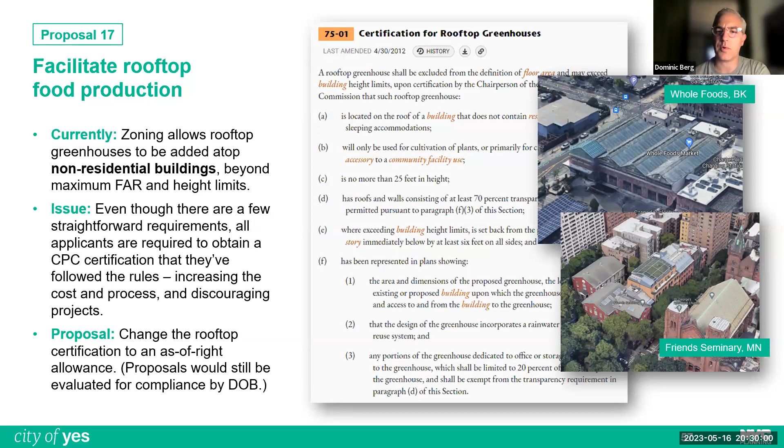Dominic, go ahead. Yeah, so actually a couple things - first on the timeline, on the site it shows early May that there were borough board reviews. That may not be being kept up to date. That's on the zoning application portal, the NYC planning portal.

But my question is kind of like what you heard on the earlier item we had, about concerns about historical context and preservation. I'm just wondering, because I know that in certain special districts there are allowances for green infrastructure to be added that breaks with whatever the limitations are from the special districts - are you all working with Landmarks Preservation and getting guidance on some of this? Because I'm concerned that a lot of these changes are going to be made, and then when we face something like what we had on the earlier agenda item, there's going to be opposition because things aren't in context, which of course this stuff is modern, right? It's new, and things are not necessarily going to stay in context.

So I'm just curious about how LPC is being engaged in this, and if there's any other consideration that granted. I didn't read the actual text. I read there's like a 14-page document that describes what's going on, and I don't see anything about that in there. Yeah, that's a great question.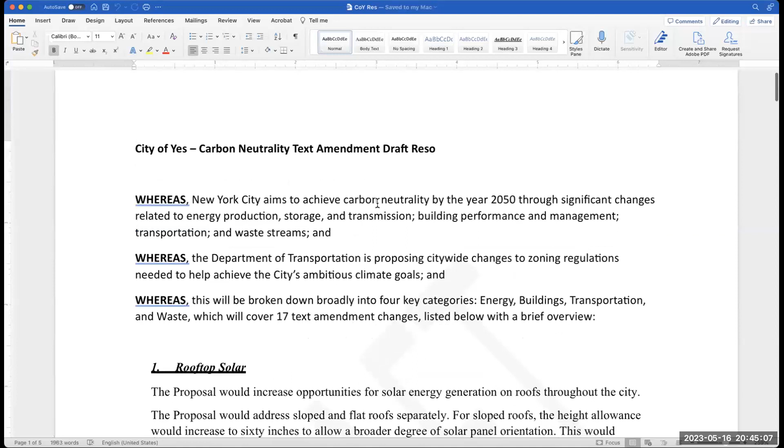All right, so I'm going to share the resolution that we have. In keeping with CB custom to have resolutions stand on their own, it summarizes each of the proposals. So I'm going to show half pages and scroll through. I'll try to go at a reasonable pace, but if I'm going too fast, unmute and let me know. If I could just add, this is just capturing information from the DCP information, trying to capture just the basics of each.

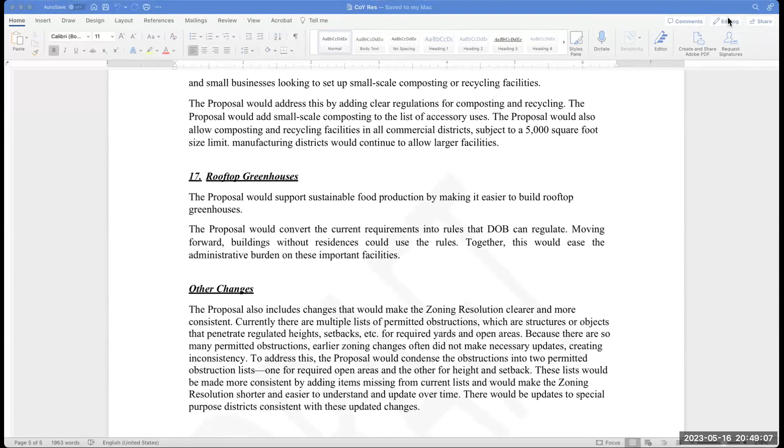All right, have folks finished reading? I'll take that as a yes. Do any people have amendments to propose to this resolution?

All right, hearing no amendments, I will propose one. Let me turn on track changes. Manhattan Community Board 3 supports the above described amendment or zoning text amendment.

Susan and Francesca, would this be the correct mechanism for sending a non-ULURP? Yeah, so we go into the portal and fill out their form, but there's also a provision to upload any resolution. So I'll fill out their form, which will be approval on the portal, and add this.

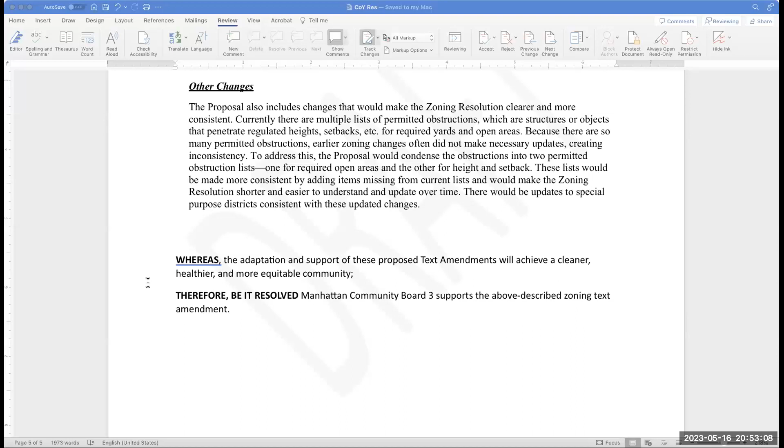Andrea, do we have you back with us? No, that's okay. All right, the resolution carries 9 to 0.

Thank you, folks from DCP for presenting, and I'm sure we will see you at least two more times in the proximate future. Thank you again for having us. It was a pleasure. All right, take care.

Final order of business for us is that we have to take up district needs. Susan, can I turn this over to you to give us a brief explainer, and then we can talk about any possible amendments to last year's?

Sure, with my apologies to people who've heard this for the last 10 years. I'm going to give a very brief overview. Most people have heard this, but we have some new people, and by next month we'll have more new people. Our district needs statement and our budget priorities are one of the most important community board functions, and it's charter mandated. Right now we're beginning the process for fiscal year 25, which starts July 1st, 2024.

So we're looking ahead and trying to plan for a year from now. First, we need to make any revisions to the district needs statement and hopefully finalize that in July so that we can then go on and prepare and vote on budget priorities in October.